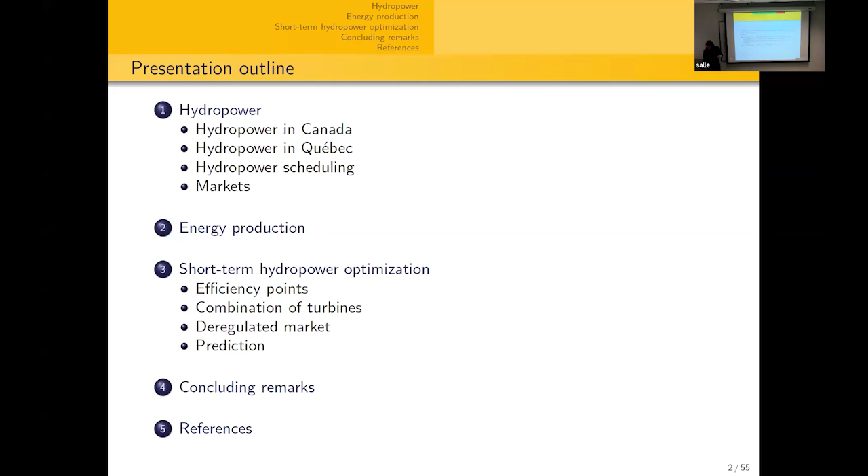Before I start, all of the work we are doing is always done in collaboration with many students and colleagues. For these hydropower projects, I work a lot with people at NTNU in Norway, and hydropower producers. I'm also still working with Miguel Anjos in hydropower with some students, Rio Tinto, and new colleagues from the Royal Military College of Canada. And of course, I take the time to thank the funding agencies for these projects.

As for the students, we founded this lab at the Université du Québec à Chicoutimi in June 2024 with one of my colleagues, Hugo Tremblay. We have a few students working with us at the moment, most of them working in hydropower optimization. I wanted to take the time to present them and thank them for some slides they helped out with for the presentation. The LabMGO is the Laboratory for Research and Modeling Graphs and Optimization, and here are a few students.

Hydropower optimization is a field I've been active in for a few years already. In Canada, 61.7% of the energy is produced by hydropower. In Quebec, we're talking about 99%. We are the third biggest producer in the world of hydropower, with a total of 82 gigawatts of installed capacity. Hydropower, once installed, is of course a clean and renewable energy.

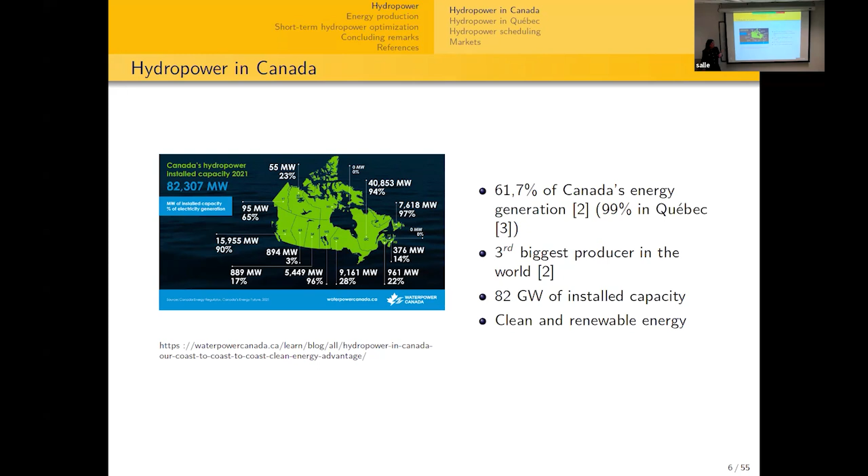In Quebec, there's no energy market, which is going to be important for the talk from a producer point of view. Of course, Hydro-Québec is on the market - this part will be interesting in the next few days, approaching February 1st, but I will not go into details. From a producer point of view in the province of Quebec, there's no market, so if you're an independent producer, you have to buy and sell at a fixed price from Hydro-Québec. Of course, they are on the markets with other provinces and with the US, and prices are also fixed for consumers in the province. So this helps a bit in the mathematical formulation.

Everyone knows Hydro-Québec is a public utility, and they manage all of the production, transmission, and distribution of energy. I work a lot with Rio Tinto, who are an independent producer for their own hydropower plant, and in this case they have to buy and sell at fixed price with Hydro-Québec. So when I'm developing models, for example with Rio Tinto, we don't have to consider the prices of energy.

Just a quick glance at the system in Quebec: Hydro-Québec owns 61 hydropower plants, 24 thermal plants, producing 44% of Canada's capacity. The system is composed of 28 reservoirs, with a total of 34,000 kilometers of distribution lines. This simply shows a picture of the province, and as mentioned, there are other independent producers besides Hydro-Québec.

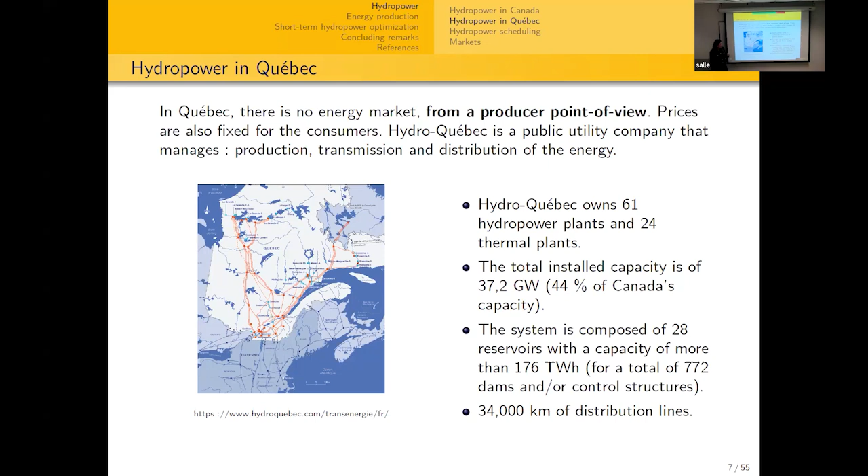I've been working with Rio Tinto for around 10 years, developing models with them. In the Saguenay-Lac-Saint-Jean region, they produce aluminum with 4 aluminum smelters, a very energy-consuming process. They own and operate their own private hydropower plants, with a total of 6 power plants in the Saguenay-Lac-Saint-Jean region to feed their own aluminum smelters.

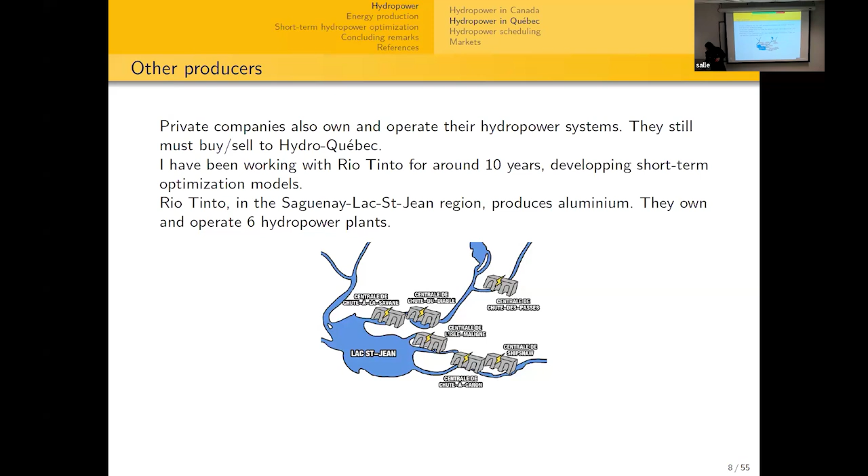So when we're talking about hydropower scheduling, what we're trying to do is determine which turbines to turn on and off, what are their water volumes, what are the reservoirs, and so forth. And the scheduling is very complex.

Hydropower production functions, I will get back to that later, are nonlinear and non-convex. We have to consider uncertainty in the inflows and in the prices. I will also get back to that later.

If we are determining which turbines to use, this induces integer variables in the problems, so it complicates the problem given that they are now nonlinear integer. We have to take decisions many times a day in order to operate the power plants effectively.

There are many turbines, many power plants in a complete hydropower system, and each turbine has a different efficiency. So for the same operating conditions, they will produce a different power output. We also want to consider this in the models when it is possible.

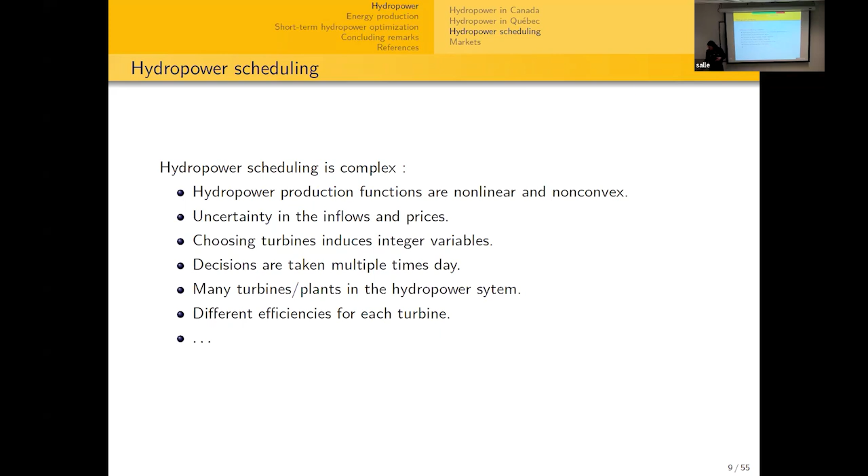Since we have nonlinear mixed integer turbines and many time steps, usually in the literature, when we're talking about hydropower optimization, there are three big levels of optimization.

On the long-term planning, we use these. For example, if we know that a turbine will be out for a few years because there's going to be maintenance, then long-term models will account for long periods of, for example, five years of planning horizon.

When we're talking operational point of view, we have the short-term and the mid-term models. When we're talking mid-term, it's really looking at the reservoir volumes, for example, taking a decision every week for the next year.

And when we are talking about short-term models, then we're defining the actual optimal strategy for the daily production. So we're determining which turbines to use every hour or every day for a horizon of maybe a week to a maximum of a few weeks. So these time horizons are divided between long, medium, and short-term optimization problems.

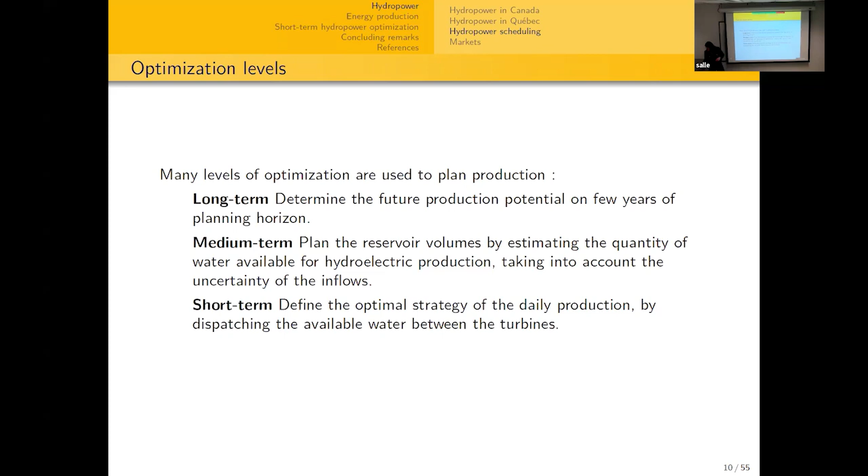So in this talk, I will talk only about short-term hydropower optimization models. This is something I've been working on for the past years.

So what are these models used for? On an operational level, we want to determine what are the reservoir volumes, what is the amount of water processed by each of the turbines, what is the amount of water spilled also at the power plant, I will get back to that, and the exact turbines in operation, and that is for each time step and for each hydropower plant in the system.

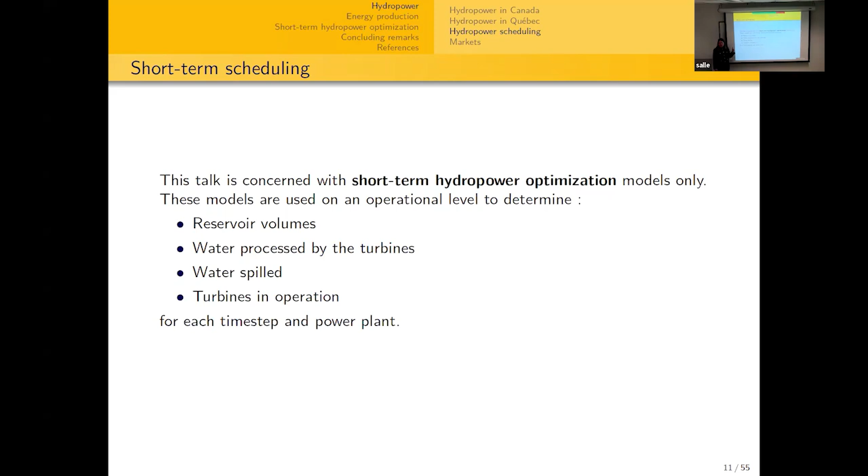So my definition for short-term hydropower is really determining water volumes and either the number of turbines in operation, I will get back to that later, or the actual turbines in operation.

So I talked quickly about the markets in the beginning of the talk. As I mentioned, when we're in a regulated market setting, such as Quebec with Hydro-Québec, from a producer point of view, so yes, Hydro-Québec does transactions, but from a hydropower producer point of view, in a regulated market, we will usually try to aim at maximizing the energy production. So we have a hydropower system, we have water available, and we want to make the most out of each droplet of water in this system.

When we're talking about a deregulated market, so I will be talking specifically about the Norwegian day-ahead market because I'm working with producers over there. So the hydropower producers have to bid on the market. They bid volumes and prices that they want to buy or sell for the next 24 hours.

And then we have the transmission system operator that takes all of these bids in from all of the producers and then clears the market, clears the bids based on all the bids for everyone, and tells every producer what is the amount they have to buy and sell and at what price. And usually they maximize the social welfare when they're clearing the bids.

And when we're talking about a deregulated market, since we're considering prices and inflows, then the objective functions will usually involve either minimizing costs or maximizing profits, compared to regulated markets, where then we will really want to maximize energy production. So these two different market settings will lead to different formulations.

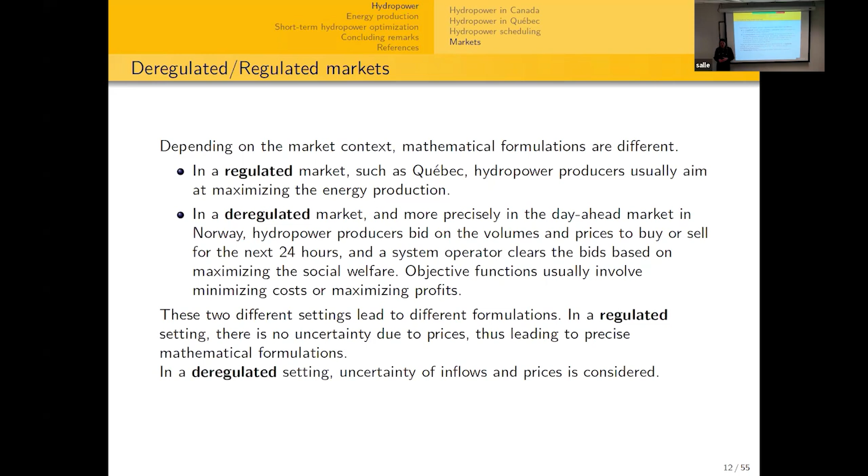So in the regulated setting, from the producer point of view, we don't consider the uncertainty due to prices, so we can have more precise mathematical formulations because then we have only one type of uncertainty. And when we're talking about a deregulated market setting, then we have to consider the uncertainty of inflows and of prices also, so it's a bit more difficult sometimes to have a very precise formulation.

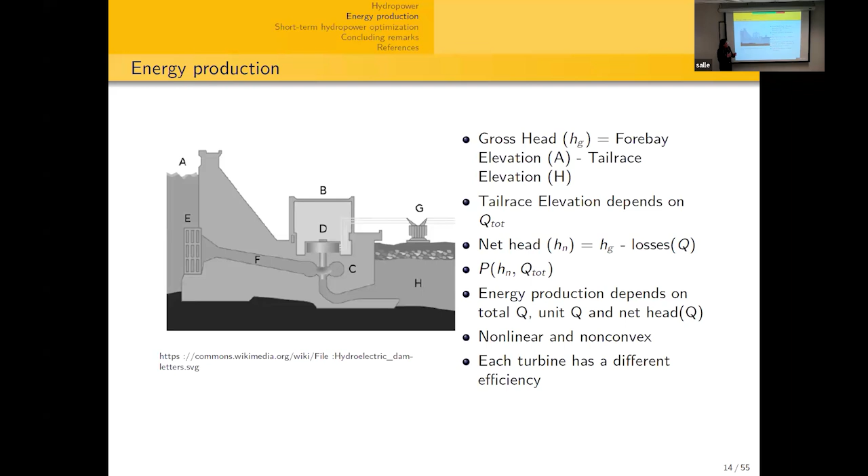So I was talking about uncertainty in the inflows. Where does this come from? Hydropower plants are located on watersheds, meaning that every droplet of water on this watershed will eventually become available to the power plant. I'm not going into more detail because I use information from hydrologists for the inflow scenarios, but I wanted to explain where this uncertainty comes from.

Of course, inflows come from precipitation, from rain. They come from snowmelt in the spring, but also from moisture in the soil, from percolation, and so forth. So there are many hydrological aspects to consider.

I'm a user of the uncertainty in the inflows, so usually I receive possible scenarios for inflows. I'm not calculating these inflows directly, but power plants are located on watersheds, and all of the water available on a watershed will eventually be available in the system. These water balance constraints are very important when talking about hydropower optimization.

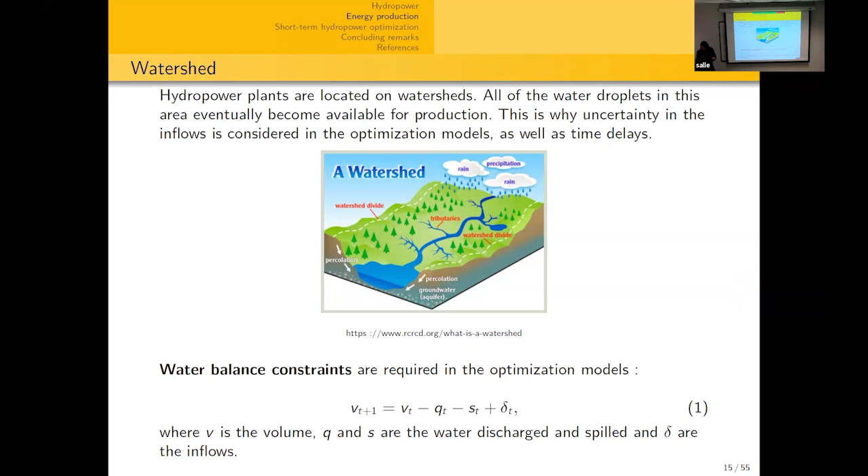So today I wanted to present two mathematical formulations for the short-term hydropower optimization in a deregulated market setting. After I will present another formulation in the regulated market setting. And finally, as I explained in the beginning, I will present an attempt with prediction that we have done for the short-term hydropower model. Today I will be mostly presenting the mathematical formulation ideas, not the numerical results. They are available in the papers, but I wanted to take the time to really go into the formulations themselves.

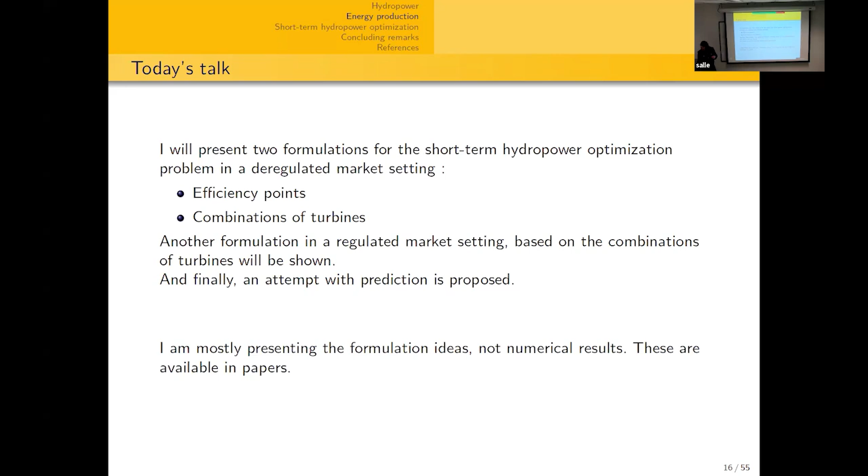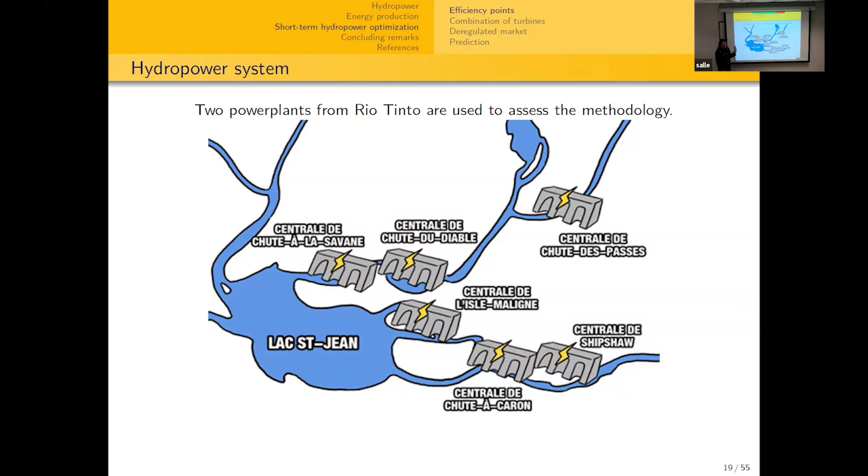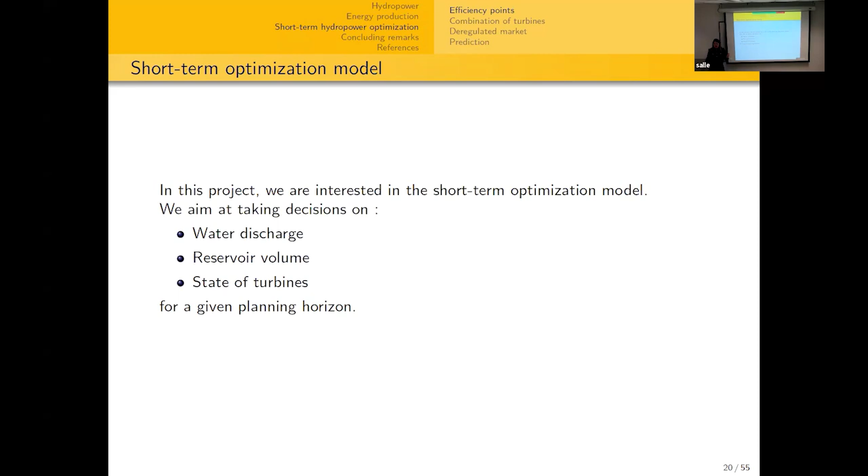So when we want to obtain a solution to the short-term model, as a producer, we want to know what is the water discharge at each plant, what is the reservoir volume or net water head, depending on how you're formulating, and what are the states of the turbine for a given planning horizon. For this project, we wanted to maximize the produced energy because we're working in a regulated market setting.

We also added the constraint of imposing max 2 startups per 10 days. So I also forgot to talk about startups. If we're doing an optimization model, we don't want the turbines to be started and stopped at every period either, because it causes premature wear on the equipment, and the operators of these power plants won't enjoy turning on and off the turbines every hour or every day.

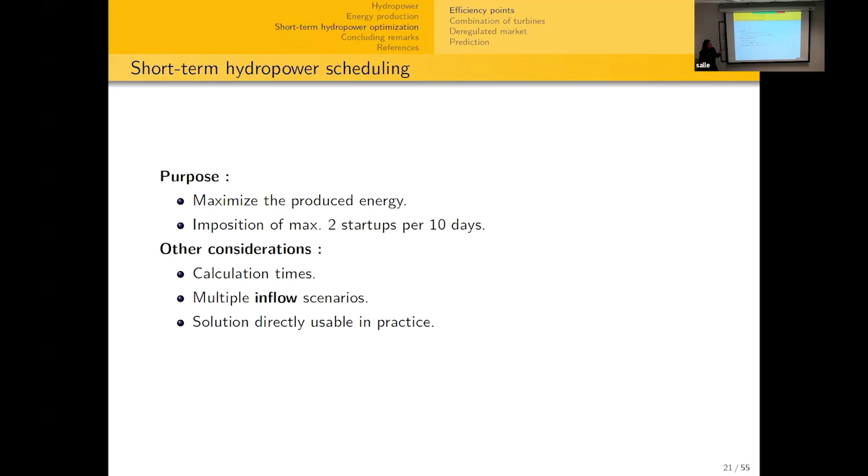So in this case, we looked at the historical data to see, in a 10-day period, how many startups are there usually. Realistically, we want solutions that are directly usable in practice, so we don't want to disrupt too much what is going on actually in practice. We looked at the data and stated that 2 startups per 10 days seemed something that was usually done in practice. We also wanted a model with quick calculation times, and we have to consider multiple inflow scenarios. In this case, we're not considering prices, simply the inflow scenarios.

So the main question when we're doing short-term hydropower optimization is how do we model the hydropower production function? If we have a big system, we could say, let's have one power production function for the power plant. But in this case, we have a short-term model, and we really want a precise formulation.

So in this case, we have 5 turbines in our hydropower plant. We have to minimally operate the plant with 3 turbines for operational restrictions. So when we're solving this model, we want to determine what is the water discharge, what is the volume, and how many turbines are in operation.

So yes, we have 10 possible combinations for 3 turbines in the system, but we decided for the first part of this model to really determine how many turbines are in operation. And if we're using the efficiency point, then we know which turbines are in operation for this efficiency point, because this is data that we have access to.

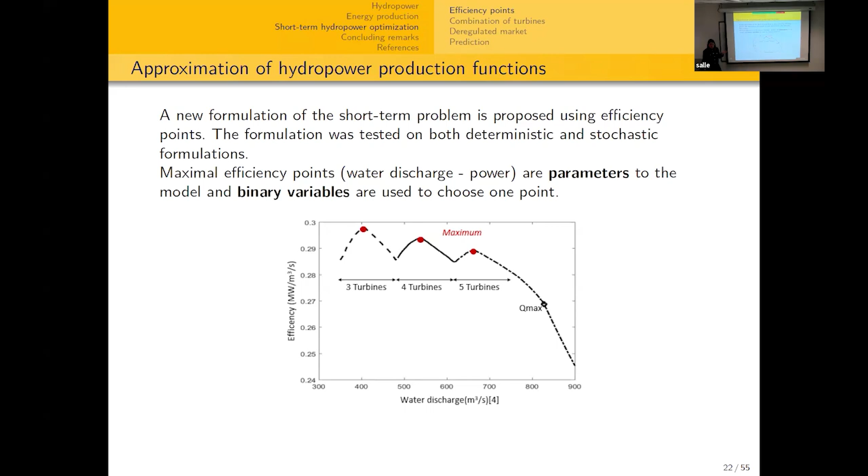But doing this, of course, if we only propose 3 points to the optimization solver, then probably it will be infeasible because we don't have enough points to choose from. So we said we had to add some points in this case. So we went with plus 5, minus 5, plus 10, minus 10 to add some points close to the efficiency point.

Why did we choose 5 and 10? Because these are the actual operational values. So if you change something in the turbine, it will go by steps of 5 actually in practice for the water discharge. So we can't discharge 2.73 cubic meters per second in a real turbine. So we went with 5 and 10 steps. This adds some points around the efficiency point for 3 turbines, 4 turbines, 5 turbines.

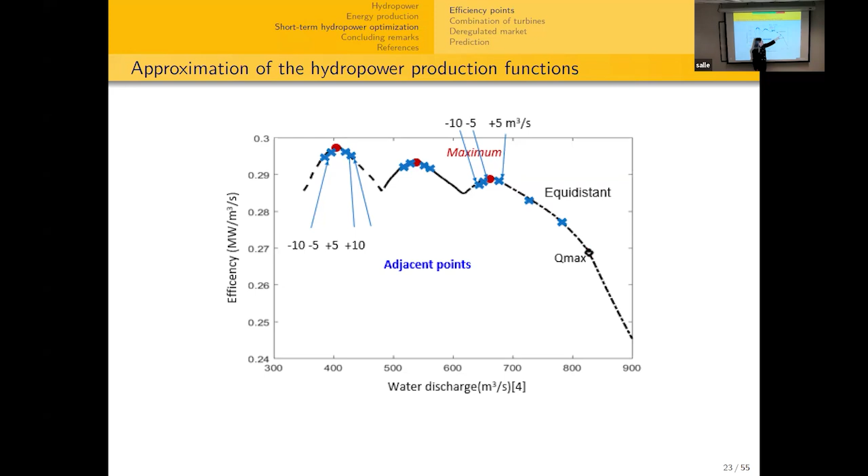And we also added some points between the maximum and the 5 turbines in operation. So what we end up with is that we have pairs of maximum efficiency points at full reservoir for a water discharge. And we have, of course, the power associated with this because we have the data. So we have a model that we are maximizing the energy production. And we have to choose 1 point for each power plant for every time step. So it's a linear integer problem, so it is quick to solve.

So as I mentioned, these were the efficiency points at full reservoirs. But when we're solving the optimization model, of course, the volume will not be the full reservoirs. So we will penalize the computed volume versus the full reservoir with a penalty that we received from the company telling us to use this value of megawatt hours for our penalties. We penalize the unit startups. In this case, we wanted to impose a maximum of 2.

The constraints are the water balance constraints, very important, as I mentioned, choosing 1 efficiency point for every power plant, every time step, and maximum number of startups. So there's also a penalty in the objective function.

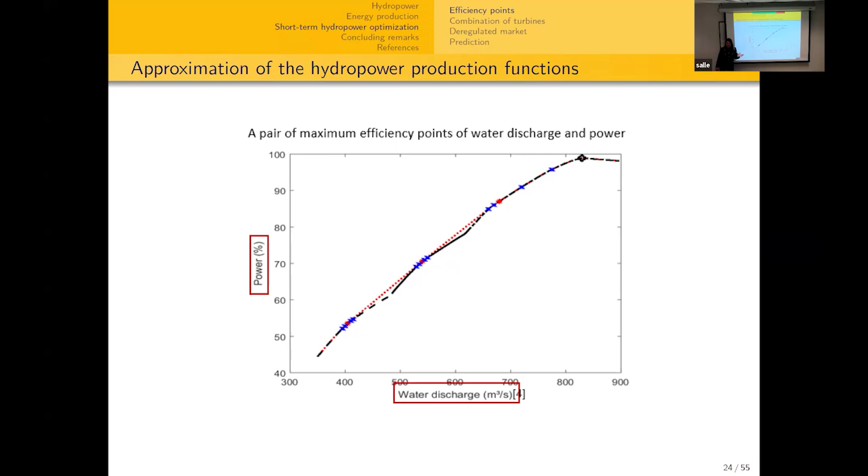So this model, by using the efficiency points, instead of having a nonlinear mixed integer problem, we solve it with the efficiency point, giving us a linear integer problem which is a lot easier to solve in practice. It also allows a more directly usable value, because in power plants they're already using the best efficiencies of the turbines to implement a decision. So by optimizing directly with the efficiency point, we get the best turbines for these values of water discharge and volume. The maximum efficiency points approach was very quick to obtain results.

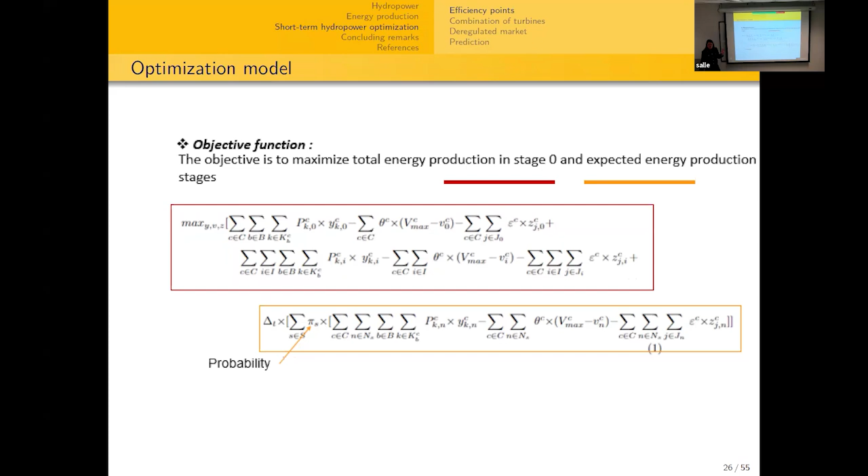We tested this with different scenario generation methods, and everything is available in the papers if you're interested. But I really want to talk about the formulation today, since this leads to a linear integer problem.

Now this second formulation, the combination of turbines, I'm talking about in detail because it's used later in the deregulated market setting. This is actually part of my thesis - it's been a few years, but we're still using this formulation in some new projects, so I wanted to take time to explain it.

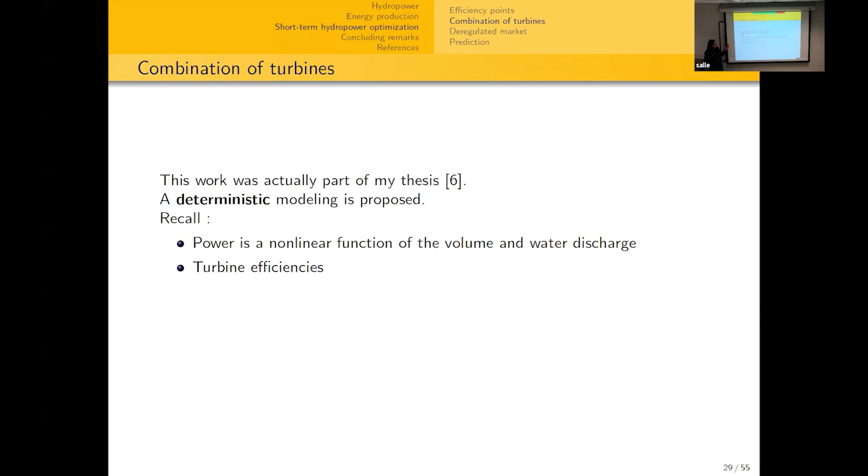Recall, power is a nonlinear function of volume and water discharge, turbine efficiency, forbidden zones of operation, and turbine startup - we talked about this for the other formulation. As I mentioned, we want to know exactly which turbines are in operation. Using single turbines in the model induces integer variables, and different numbers of turbines will change the net water head. Everything is nonlinear, non-convex, so how do you account for that easily?

In this project, we said, why don't we work with the number of active turbines and develop a two-phase model? The first phase computes water discharge, volume, and number of active turbines. The second phase simply determines which combination of turbines to use. So we split the model in two.

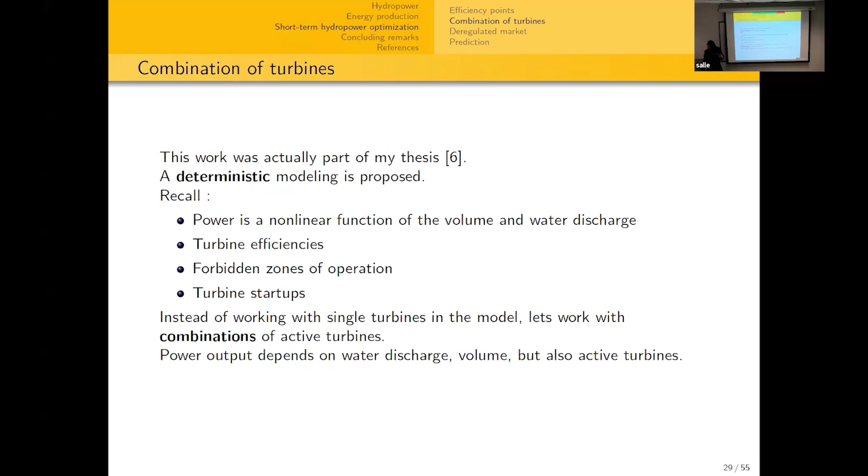When we talk about combinations of turbines, using the same example as before with the same system of 3, 4, or 5 turbines, there are 10 possible combinations of 3, 5 possible combinations of 4, and 1 possible combination of 5.

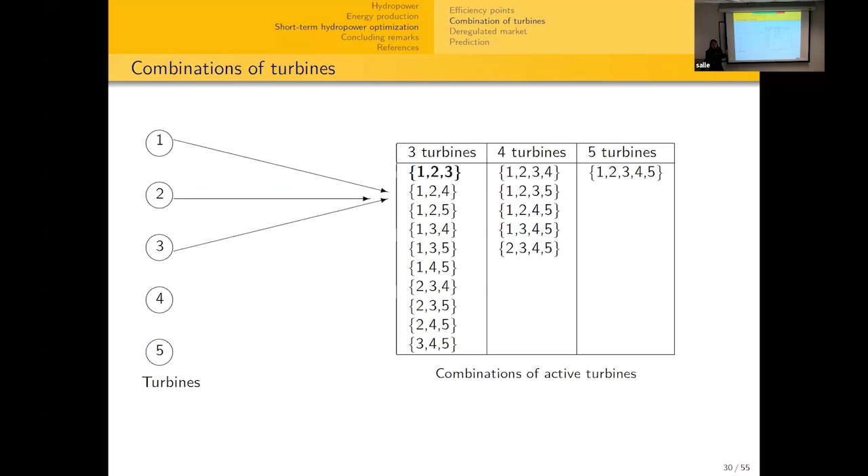So what we did is conduct pre-processing to build surfaces of hydropower production functions using a dynamic programming algorithm. We built these surfaces, optimized them to determine how many turbines have to be in operation, and then selected the actual combinations of turbines to use, based on the maximum power output.

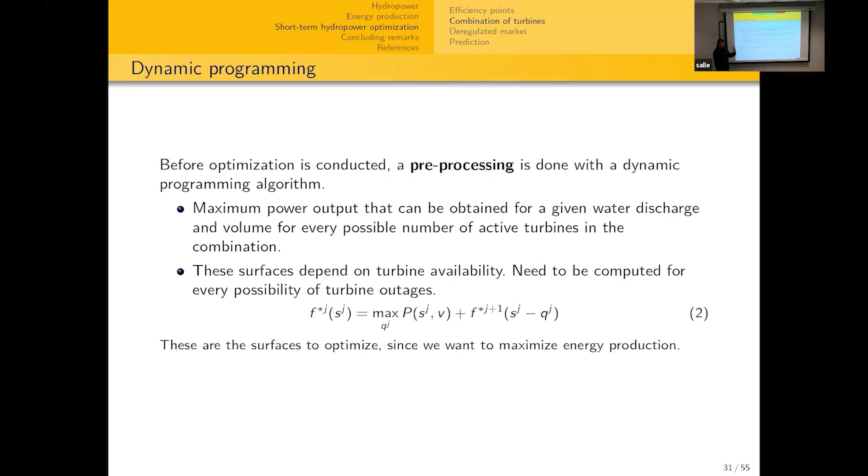We created one surface for every number of active turbines. For example, with 3 active turbines, for every discretization of volume and water discharge, we calculated a dynamic programming algorithm for the 10 possible combinations of 3 turbines and took the maximum - that's the point you see on this figure. For the other discretizations, we ran the dynamic programming algorithm again 10 times, took the maximum to build these surfaces. So for every data point on the surfaces, we ran the algorithm 10 times, 5 times since there are 5 possible combinations, and 1 time for the single combination.

These give us our hydropower production functions that we can then optimize in the objective function of the optimization model. So yes, there's a lot of pre-processing time the first time you do it, but once you obtain your actual hydropower production function, you're simply solving your optimization model based on these.

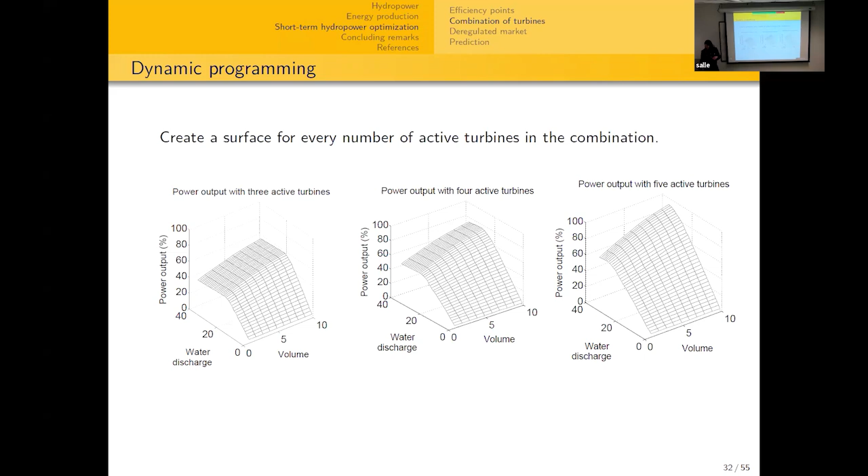So we have surfaces. Now, if we want to use these surfaces in an objective function, we have to approximate them - there are many ways to do it. We've approximated these using polynomial approximations in some papers, and splines in others. So there are many ways to approximate these surfaces afterwards to be able to use them in an objective function.

So in these surfaces, we have water discharge, volume, and number of turbines. But how can we penalize the unit restart, the unit startups? So we separated the problem in two: the loading problem and the unit commitment.

The first phase gives us the optimal number of turbines, either 3, 4, or 5, water discharge, and volume. Then we give this as input to the second phase, which is the unit commitment, and we determine exactly the combination of active turbines. So we give the model volume, water discharge, number of active turbines.

Let's say it was 3. Then in this model, we have 10 possible combinations of 3 active turbines. So we will have 1 integer variable for each of these combinations, and we ask the model to choose only 1.

By decomposing this into 2 phases, yes, in the loading problem maybe we're doing a small over-approximation, but it still allows us to quickly determine the optimal number of active turbines, and then determine the exact combination for the active turbines.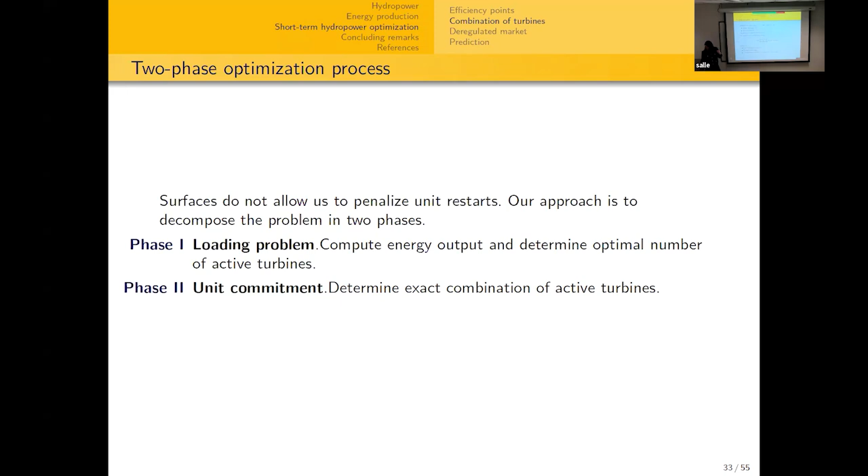So quickly, the variables are, as I mentioned, water discharge, reservoir volume, number of active turbines. We want to maximize the energy. Here we can see these are our surfaces that I presented in the previous slide.

So what is the power produced for a given volume and water discharge? We have our water balance constraints, bounds on our variables, minimum and maximum water volume, and maximum water discharge. And we want to choose 1 number of active turbines per period.

So what we can see here is that we have a nonlinear integer problem because we have integer variables for the choice of the number of active turbines.

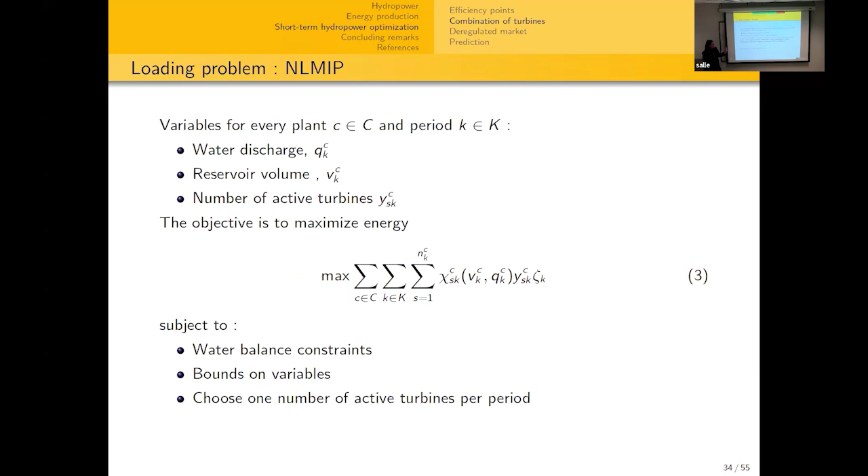I'm not going to do all of the proof, but in this case, since the matrix of the coefficients of the constraints, because our constraints are simply water balance, bounds, and choosing 1 variable, this matrix is totally unimodular. So dropping the integer variable and solving a continuous nonlinear problem is sufficient to obtain an integer solution.

So this was the small hack here. With this problem, we're solving a nonlinear continuous problem, and we're still obtaining an integer solution on the choice of the active number of turbines.

So computational time is very low because now we have a nonlinear continuous problem. IPOpt, for example, is very quick in solving these problems. So relaxation is sufficient to obtain an integer solution. This was one of the main advantages of this method.

In the second phase, as I mentioned, we give as input the water discharge, the volume, and the number of active turbines already computed. Then we simply choose the exact combination, and we penalize the startups also in between every time step. This model is also very quick to solve because it's a simple linear integer problem.

So this was the main advantage of this method: the relaxation of the first model, which allows us to still have an integer solution. But there are drawbacks with this method. I will go back to it right after when I'm talking about the deregulated markets.

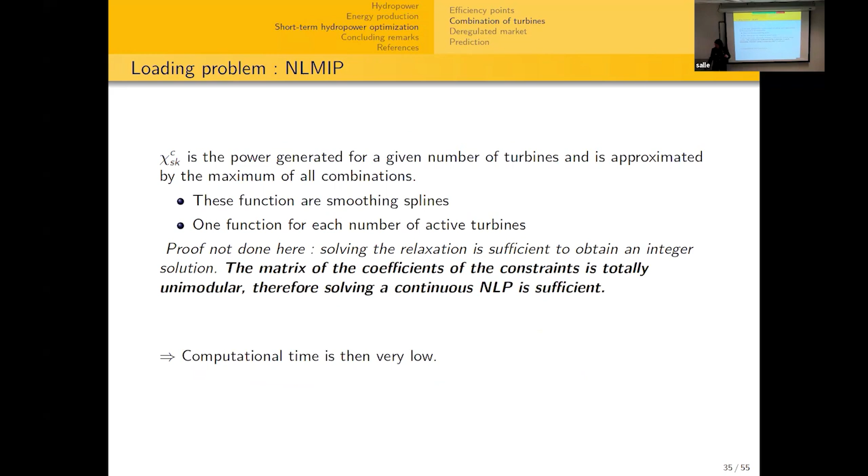I talked about this combination of turbines in detail because I want to go into the deregulated formulation. This project is still ongoing, so it's going to be available soon. We submitted for a presentation, but the paper will be published next month, I would say.

This is in collaboration with NTNU and ANEO, which is a hydropower producer in Norway. So we have actual access to real data for a real hydropower system over there. This is also part of Mohammad's thesis.

So here I'm talking about the Nord Pool day-ahead market. As I mentioned in the introduction, hydropower producers submit their bids for the next 24 hours. They have to give: here are my bids for the next 24 hours, here are my volumes, here are my prices. Then the operator will clear the bids based on everyone's bidding.

Nord Pool accepts many types of bids. The ones we mostly see in the literature are the hourly bids. So you're simply giving hourly bids, which are curves of volumes to buy or sell for each hour, dependent or independent of the price.

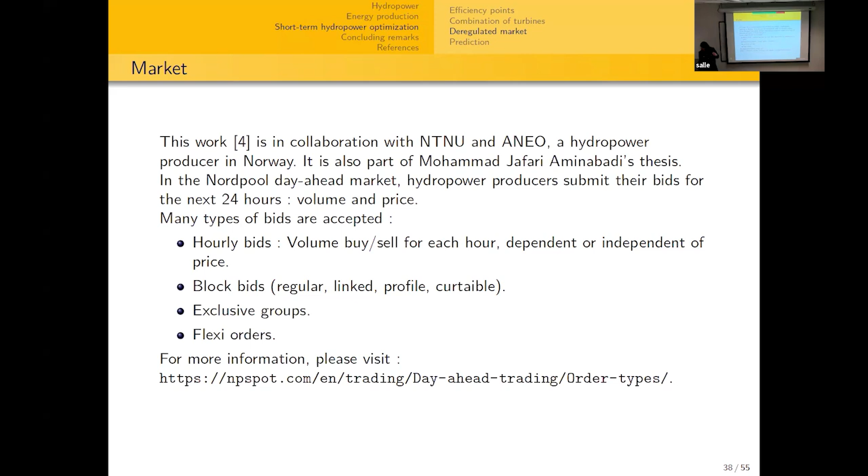And for this project, we are interested in looking at the block bid. So we're using exclusive groups for profile block bids. So what we have to do is to submit profile block bids, so volumes and prices for the next 24 hours. So few papers have addressed the subject of profile block bids and exclusive groups in the context of short-term hydropower optimization.

And what we are interested in is looking at, well, is there an interest in using block bids versus hourly bids? Because most of the papers are using hourly bids. So we want to compare results from the block bids with the results with the hourly bids to see where is exactly the advantage in these methods in using this type of bids, if any.

And we want also to maybe compare with SHOP. So SHOP is a widely used optimization tool for the hydropower producers in Norway. It's developed by Sintef. And in this case, it's a successive linear approximation. So if we're comparing the results with SHOP, then we really want to use the nonlinear formulation. SHOP is using a linear formulation.

We want to compare the regular blocks and also the block bids. So the hourly bids versus the block bids. And in this case, as I just mentioned, we want to use the two-phase combination of turbines that I just presented to really have a precise mathematical formulation for the hydropower production function. So we're looking at mathematical formulation and the exclusive groups or the profile block biddings that are not studied that much in the literature.

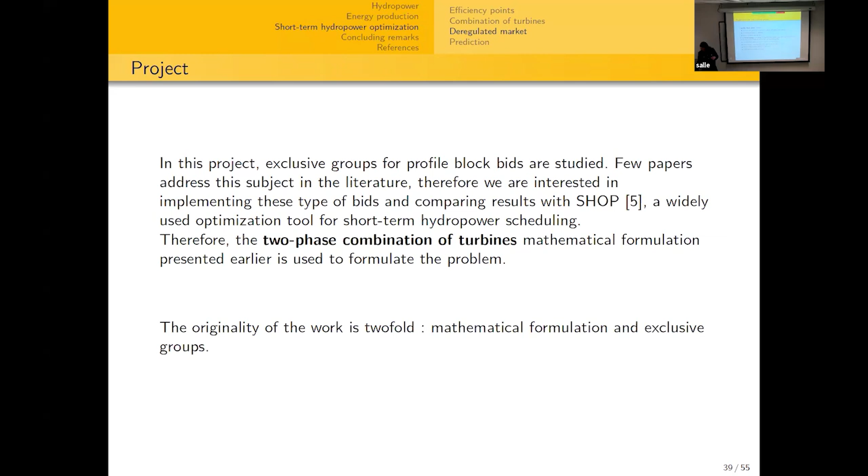So when we're talking about a profile block order, so when we're submitting bids to the market operator, we have to determine what are the volume and prices for a certain number of consecutive hours. In Norway, a block has to be minimum 3 hours. So you can have as many as you want, but they have to be 3 hours minimum. And a block is either buy or sell. You cannot, in the same block order, have buying and selling.

And when we're talking about exclusive groups, then it's a cluster of profile block bids. You can have maximum 15 block bids in this cluster. And you can only activate one of the block bids per exclusive group. And there's a maximum number of exclusive groups that you can bid. If I recall, it is 3.

So why are profile block bids interesting compared to hourly bids? So this is something that we have to validate with our upcoming results. But these types of bids could be interesting for hydropower systems that have limited or no flexibility. So by submitting profile block bids, then you know for a certain number of hours that your production will be stable. So if you have very limited or no flexibility, this can be an advantage.

Hydropower systems that have very high startup and shutdown costs could also benefit from block bids, because then you can submit a block that is, for example, 8-hour long, and you know that you will have no startup or shutdown in this period. Markets with volatile electricity prices, then you can fix your production also for a few hours. And of course, for long-term strategic planning, again with profile block bids, because you're submitting blocks of hours.

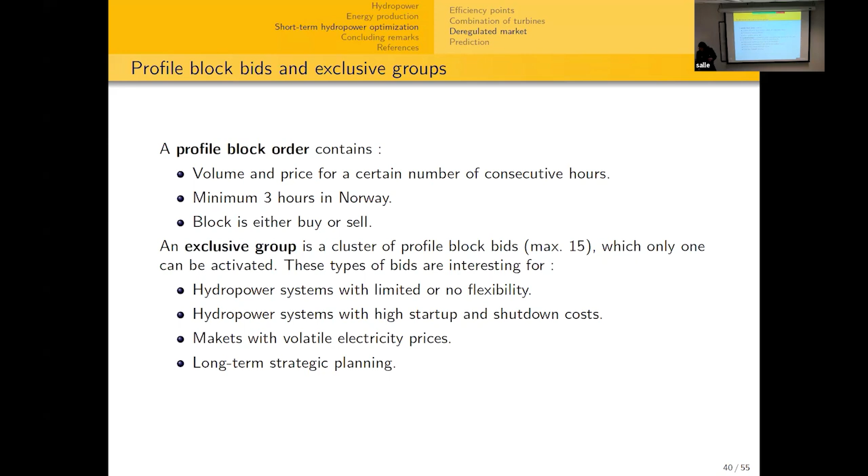So for the project, SHOP uses successive linear programming, and they use mostly hourly bids most of the time. We're interested in seeing, okay, let's use the nonlinear combination of turbines that I presented and use the profile block bid. So in this case, we have to consider uncertainty for prices and inflow.

And what we're doing is that we're using the first phase model that I presented, so that we're trying to maximize the energy production. We have water balance constraints, and we're choosing the number of active turbines. And so we're using the first phase model to actually generate these profile block bids. So we're simply generating block bids with a certain number of hours, with volume, with prices that help in maximizing the energy production. And in the second phase of the problem, we will solve using different possible scenarios for prices and for inflows, but we will actually select 15 blocks.

So in the first phase, we use a combination of turbines to maybe generate 500 or 1,000 profile block bids. And then we use all of these block bids as input to the second phase, where we only select 15, because the market only allows us to select 15 blocks per exclusive group. So we're using the nonlinear formulation for generating the profile block bids, and then in the second phase, we're actually selecting these 15 blocks.

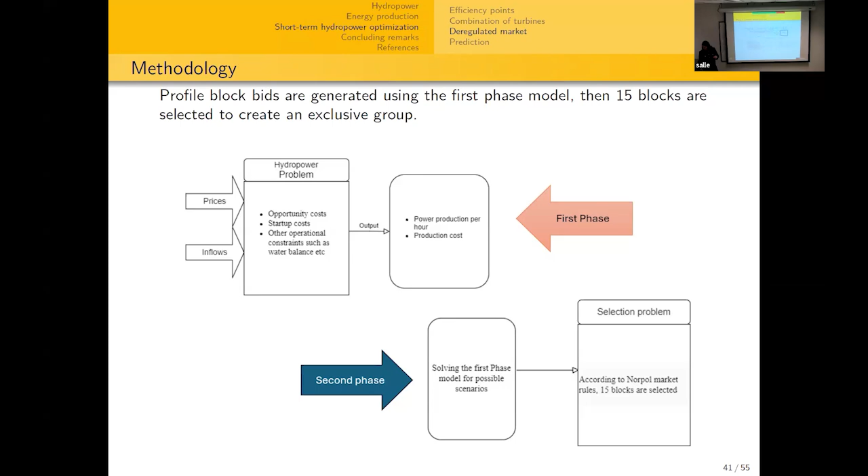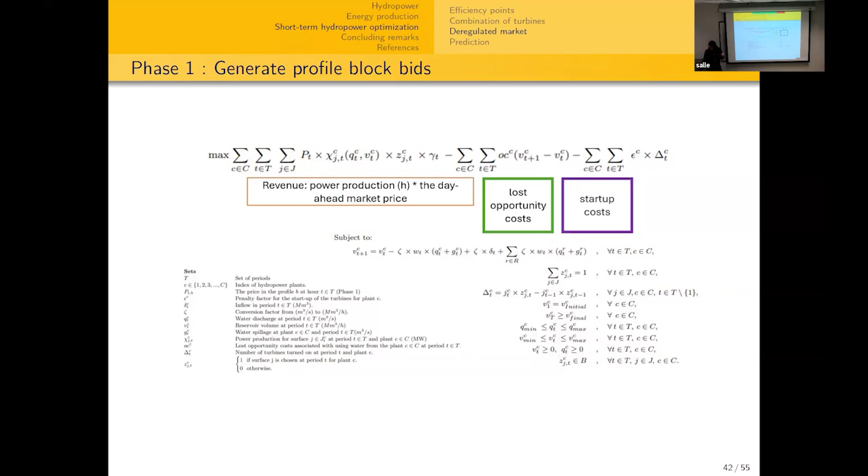And in our second phase, we're creating the exclusive groups. So we want to select a maximum of 15 blocks per group. And so depending on whether we're submitting 1, 2, or 3 exclusive groups, we will solve this problem 1, 2, or 3 times to have 3 exclusive groups to then submit to the market and obtain the clearing afterward.

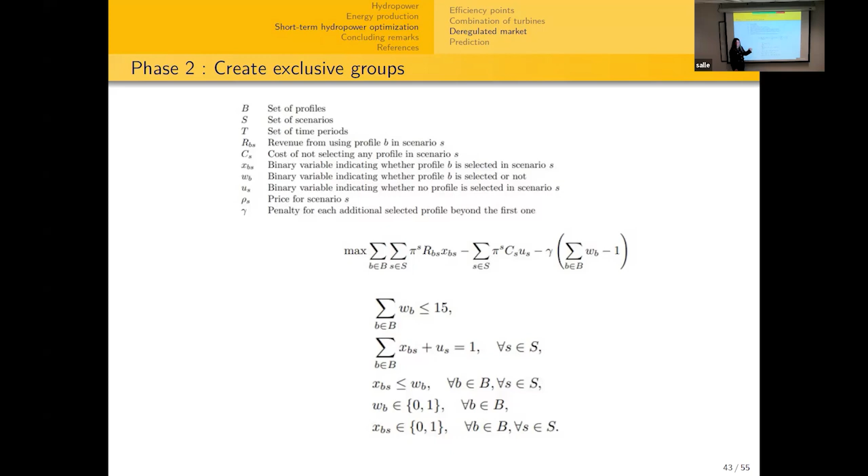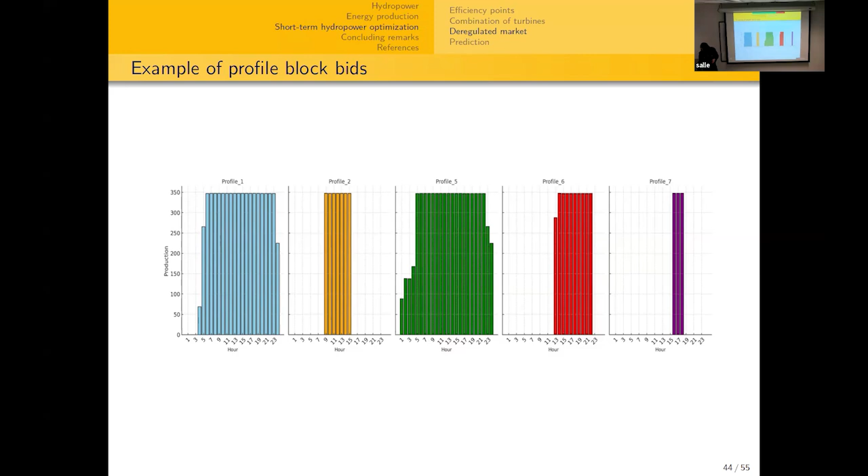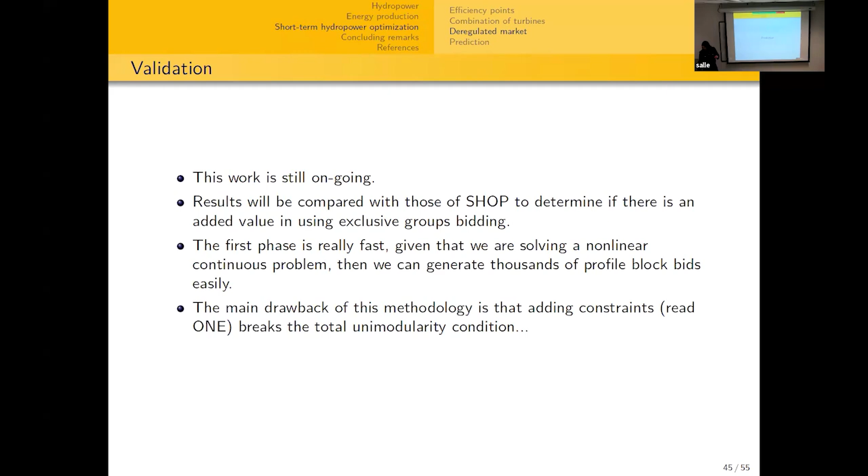So I guess 5 minutes, Olivier? Yeah, 5:10. Okay, so I think I have time.

Anyway, this is very fast what I wanted to show with prediction. I'm not from the prediction field, but everyone is doing machine learning. So why not try it on hydropower optimization? This was a question I had. Everyone is saying machine learning is doing great things. So could we try to use prediction to solve the short-term hydropower optimization problem?

This is part of Yoan Villeneuve's thesis. It's also ongoing work. The paper will be out real soon. Hydropower producers have large amounts of data. For example, with Rio Tinto, for the last 60 years, they have data every 2 minutes on the whole system. So this gives us a lot of data to work with. Looking at all this data, could we try to maybe predict the operations of the power plant?

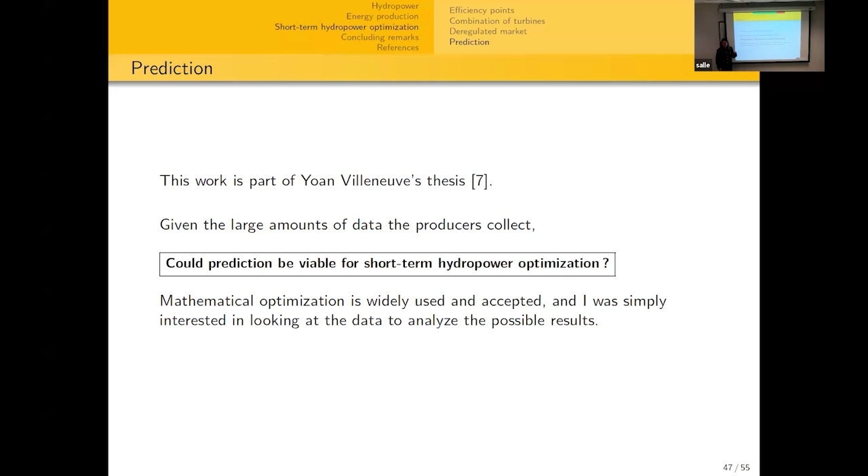I was really curious. Okay, mathematical optimization does work well. We are still developing new formulations, but I was just curious: if we do a really straightforward prediction, what will happen? What will be the result? So for this project, we said, okay, let's try to describe the short-term hydropower problem in terms of machine learning in a predictive setting.

So we want to predict the next 96 hours of water usage for each plant. And we want to compare the results with a mixed integer linear programming model, more specifically the efficiency points method that I presented in the first part of the talk, because we have a lot of results on this formulation, and it was tested and validated also.

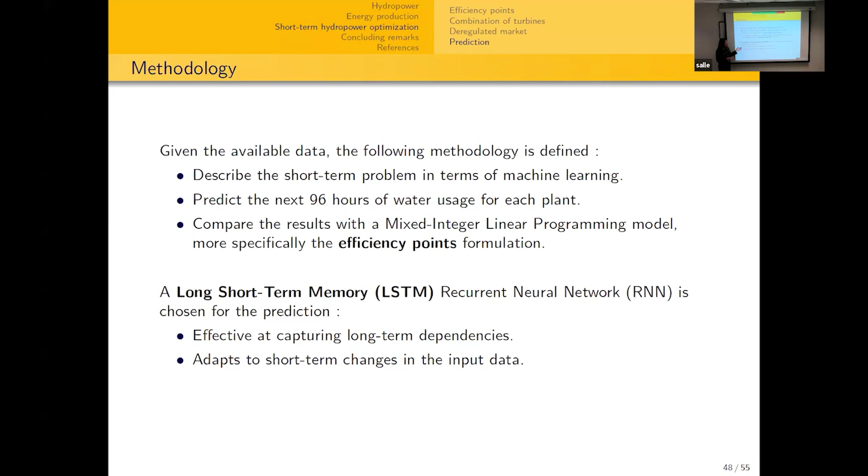So we use the long short-term memory recurrent neural network to formulate the problem. Today I'm not going into the details of this formulation. I wanted very quickly to talk about this prediction without too many details. So we chose the LSTM because it's effective at capturing the long-term dependencies, and it also adapts to short-term changes in the input data. When we're talking about hydropower optimization, the inflows are updated every day or twice a day, so we have to always re-optimize based on this data.

So one of the difficulties first. Again, we're working on these two power plants, Chicoutimi. They're on the same river. There are time dependencies between both. The output of one affects the next one. And how can we model this in prediction? So we want to predict the operation, but then the operations upstream have an impact downstream. So how can we model this spatial temporal dependency?

So first of all, he decided to solve the problem independently. First solve Chicoutimi, and then use the inflows and the changes in the data, give this to the next plant, and then predict it as well. So maybe not the best methodology, but it was very difficult to try and model everything in the same predictive model. That's why it was divided into the two power plants, and the decision of the first one actually affects the second one afterward.

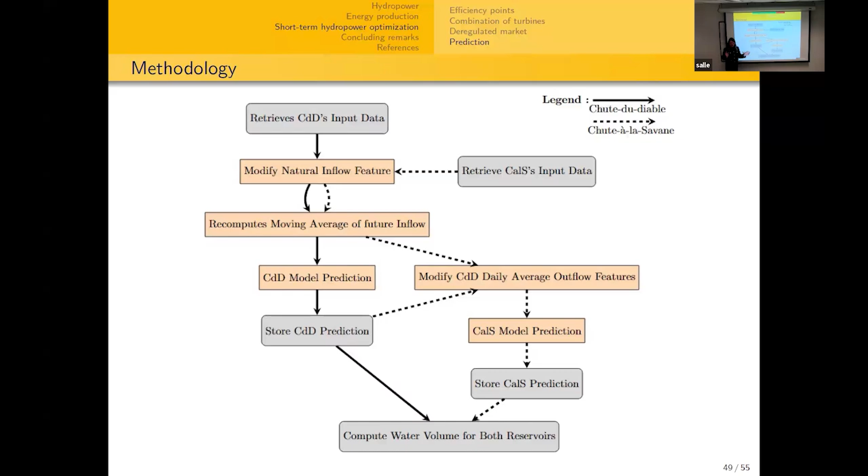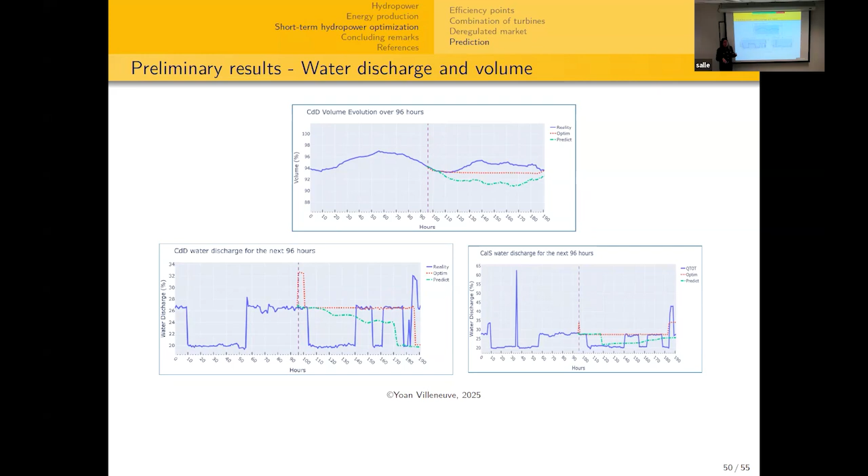So this was interesting to see, just as very preliminary results. But then with only these preliminary results, we see that water discharges and volumes are not too far from reality, but final volumes are almost impossible to enforce with the LSTM because it's predicting in the future. When we're doing optimization, we have to value the remaining water in the reservoir at the end of the horizon, so we don't empty the whole reservoir, because we're maximizing the energy production. So we have to give value to this water remaining in the reservoir. How can you enforce the final volumes? This is a question that we still haven't answered. So it's already difficult for the deterministic version to give a final value to the prediction, and with a stochastic version it will also add to the difficulty.

Number of turbines in operation requires a post-processing of the results. This isn't something very difficult to do, but it adds to the calculation.

Training the model—I have very preliminary results here, but we had a training set of 84,000 hourly instances, which took around 20 hours to calculate on a cluster. And for the validation we had around 21,000 instances. So this is also preliminary results based on a really straightforward prediction. I was just interested in looking at, we have all this data, if we try to predict something, is it close or not to what we're usually obtaining as results? So, interesting project. There will be a next phase with better prediction models, of course, beyond this simple, straightforward prediction.

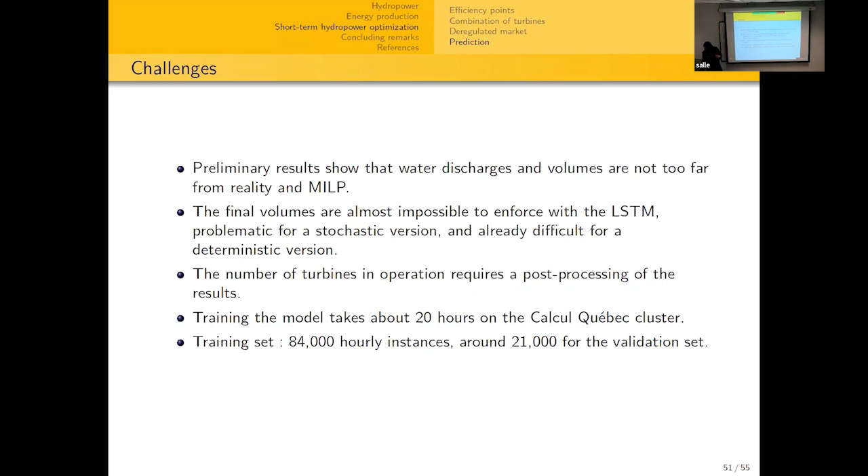So today I talked about different formulations in short-term hydropower optimization. It's a rich field, there's many things going on, and there's still a need to improve the models because we always want to do the most we can out of the available water in the reservoirs. So I presented two formulations: using combination of turbines, and efficiency points. These were mostly in a regulated market setting, then the deregulated market setting, and a bit of a starting work with prediction.